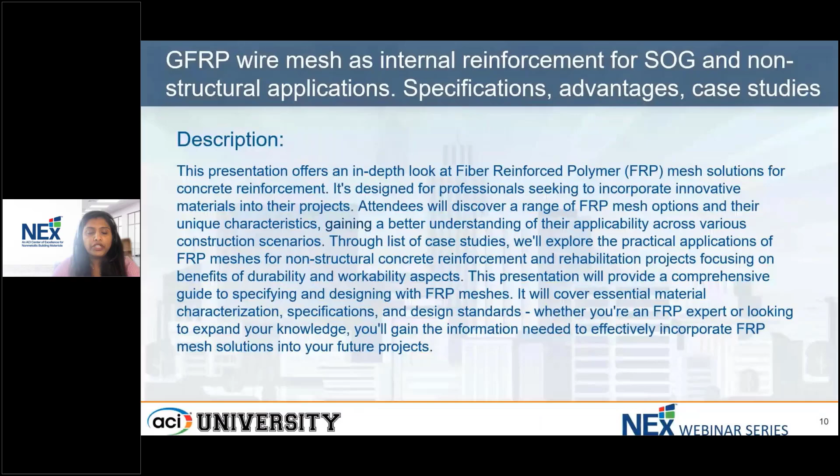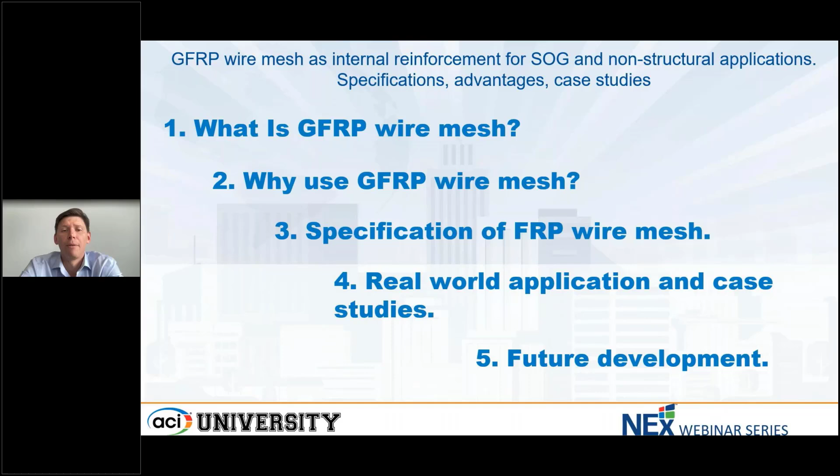Today, we will touch several topics. First, we will start with FRP. What is FRP? What is GFRP? What stands for FRP? Why do we use GFRP meshes? What's the case and what's the reason for so? Then we will definitely describe the specification of FRP wire mesh and then the real-world application and case studies. However, as with ACI, progress never stops. We will also touch the future development.

So what is GFRP wire mesh? To discover that, let's discuss what is FRP, what stands for FRP. So FRP is fiber reinforced polymer. It means that we have fibers and polymers involved. When it comes to fibers, there are multiple variations, the same with the resins.

Basically there are two main types of resins used to bind the fibers, either thermoset resins or thermoplastic resins. When it comes to thermoset resin, there are several options as well: it can be vinyl ester resin, epoxy resin, polyester resin, or polyurethane. When it comes to fibers, there's a great variety as well. It can be glass fibers, basalt fibers, carbon, and aramid, known as Kevlar as well, but Kevlar is a trademark.

So to figure out what these acronyms mean is very easy. We love these acronyms in our industry, but it's pretty simple and straightforward. For GFRP, it's glass fiber reinforced polymer, so the first letter means the fiber type used. Same with BFRP meaning basalt, CFRP meaning carbon, and AFRP meaning aramid. On the slide, you can see the difference in the appearance of different bars. Glass is obviously white, basalt is dark olive or brown if you will, carbon is black, and this goldish color is aramid. The resin looks the same; pretty much all resins look the same.

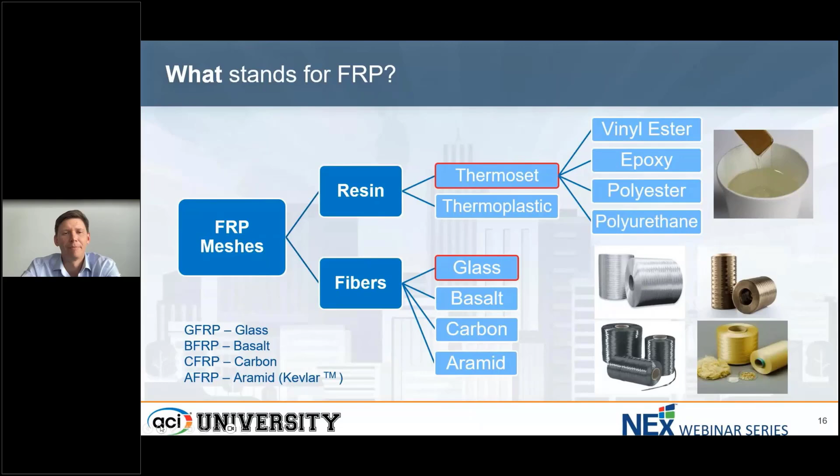To manufacture the FRP or GFRP specifically, wire mesh, we have to produce the wire or rebar first. This slide shows the production method called pultrusion, described with pictures and a scheme. First we take fibers from the creel, send them to the bath with resin, and impregnate them with the resin, then send them through the die to form the shape of the wire or rebar.

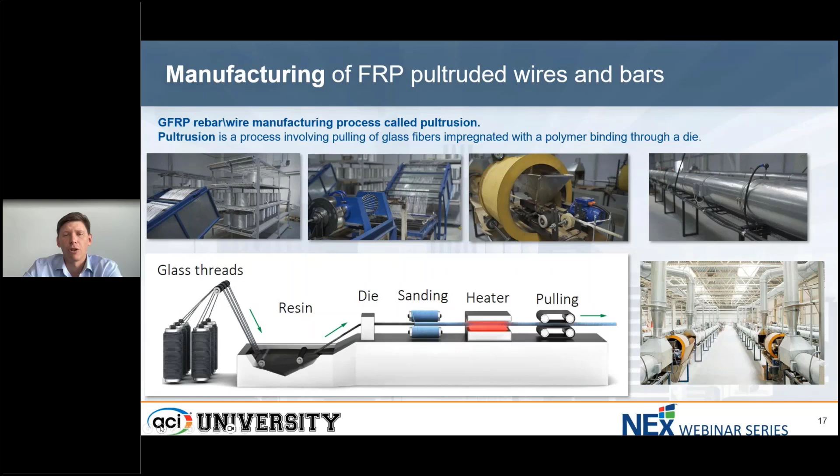Then, depending on the product, some bars or wires are sand coated, or receive some other surface treatment. Then the bars or wires have to be heated to cure the resin, and at the end of the line we have the pulling system and the cutting machine. So it can be very well seen here on the slide - from left to right, all stages of the manufacturing process are shown.

So when we come to the point of the difference, why do we talk about FRP as a different material? I would like to yield the floor to Dr. De Caso to explain the difference in the behavior of FRP materials compared to steel.

Thank you, Igor. Shifting gears, I want to focus on three main things in this slide, specifically discussing wire versus bar. On the left-hand side, you see a scanning electron microscope image of a cross-section of a wire and a bar. The little dots represent each individual fiber filament, and the darker part represents the resin, as Igor mentioned, that surrounds it. So a key aspect of a bar versus a wire is obviously the overall size.

As you reduce that size from a bar to a wire, ensuring that you have adequate distribution of the fibers, and adequate saturation around those fibers, is going to be critical in order for that wire system to be effective at transferring loads as it goes through the concrete into the reinforcement.

On the right-hand side, we see a typical stress-strain curve with three colors. Let's start with the bottom, red - that is your typical steel 60 KSI performance. You have that plasticity, that plateau, that horizontal line that continues probably all the way until a very large deformation. This is a ductile material, it elongates. And we'll start here by saying that FRP does not behave like that.

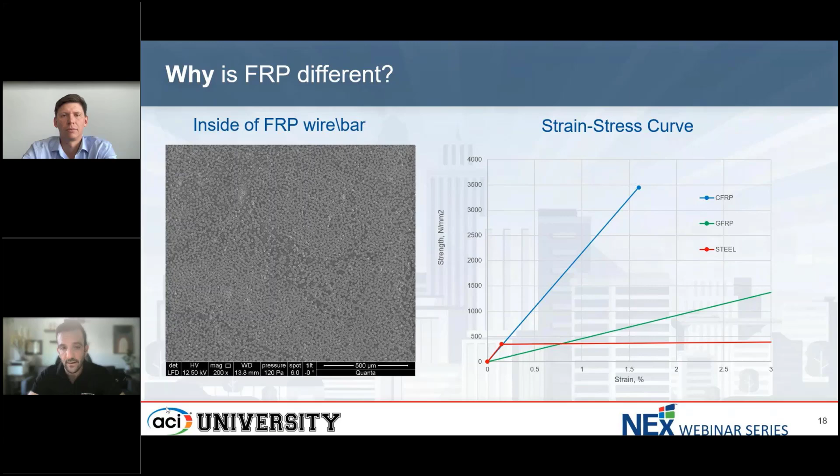It's important to say we have a good and fundamental understanding of these materials, and with this understanding we can therefore understand how to design and how to use them. And obviously I went a little too far, so let me go back.

I should open a parenthesis that currently as chair of ASTM D30.10 subcommittee on composites for civil structures, we're working on an FRP mesh specification. This is a standard specification, and it looks at the classification of different FRP mesh types. We're primarily dividing this into 2 parts.

On the left-hand side, you see what we call the wire type. These are typically composed of longitudinal elements that are less than 1/4 of an inch nominal diameter, and you can see designations like W1.4 or 10 gauge. So we are borrowing the same nomenclature that steel has in order to adopt, classify, and identify the different dimensions of these wires.

And in the same way, you have on the right-hand side the bar type mesh or mat. These are typically formed starting from number 2 bars, or 1/4 inch nominal diameter bars, and then assembled together in that orthogonal X and Y direction.

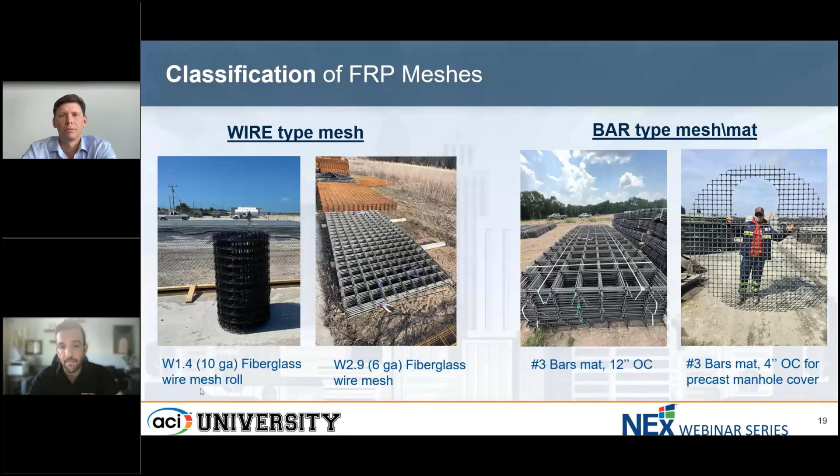The main thing is that they're going to have typically a bidirectional approach, intersecting at orthogonal angles, and they're going to have a spacing. It's important to understand that the spacing doesn't have to be equivalent in both directions, depending on the application, if you want more reinforcement in one direction. As Igor introduced on the manufacturing, there can be different spacings between both the primary and the secondary direction.

Talking about the mechanical fastening, or how we tie those elements either from a wire standpoint or from a bar standpoint, I think the industry is experiencing a lot of innovation and creativity. On the left-hand side you can see what is typically seen, an example for bars where plastic zip ties are used. Steel or coated steel ties can also be used in these applications, although it's typically not preferred in order not to introduce any steel into the concrete section.

On the right-hand side is a photo that Igor took at the last World of Concrete, as a startup company. What you see on top are those four FRP bars running longitudinally, and this is a manually operated machine that can put ties, in this case four snap ties, at each instance when you press the button of this prototype machine. Then you can slide the bars however much you want in and out, and then place the other bar, and then snap four ties.

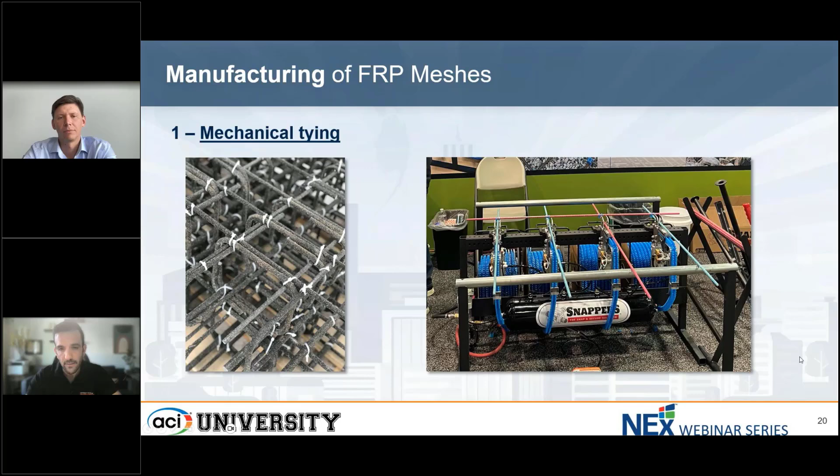So this gives you an idea that if you're looking at manufacturing either offsite or bringing fast tying and reducing labor of the tying, in this case this would be applicable to the bar type meshes. There are certainly a lot of solutions, from the traditional manual ones to a lot more innovation.

Another type of connection is injection thermoplastics, where it creates a plastic weld, in essence, between those elements, in this case the bar elements, controlling both the spacing and the location of each of the bars. That's primarily the objective of that connection, or that quote-unquote weld, is to ensure that when handled, when placed, and when casting, they stay in place. So we do not want to see any displacement or any relative slip between those mesh elements, whether that's a bar or a wire type.

So that even if you handle it, take it out of a truck, throw it, step on it, as we will see in some videos, the joint becomes very important in making sure that the mesh remains true to its dimension as it goes through the construction process.

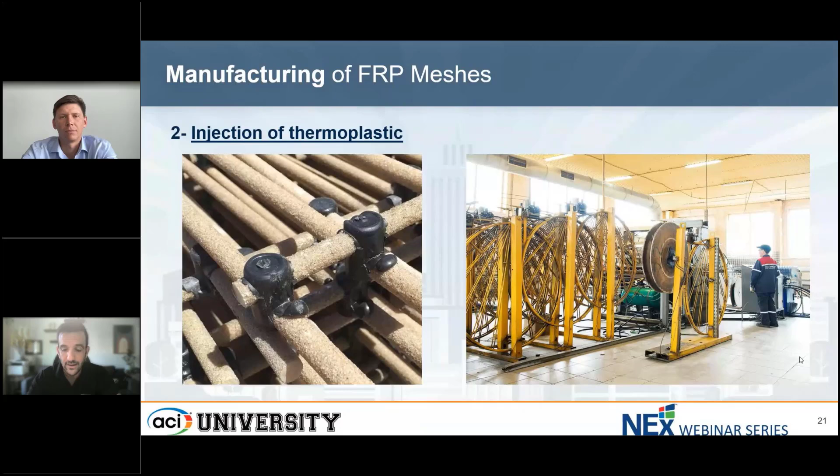On the right-hand side you see an exciting photo, I think, at least I find it exciting, on coiling. When we start talking about small diameter bars or wires, you can certainly start coiling the material, which hopefully makes you think transportation, different locations for obtaining the mesh, and then manufacturing meshes near the construction site by having a larger quantity of volume being shipped without shipping too much air. So exciting stuff happening around the wire side.

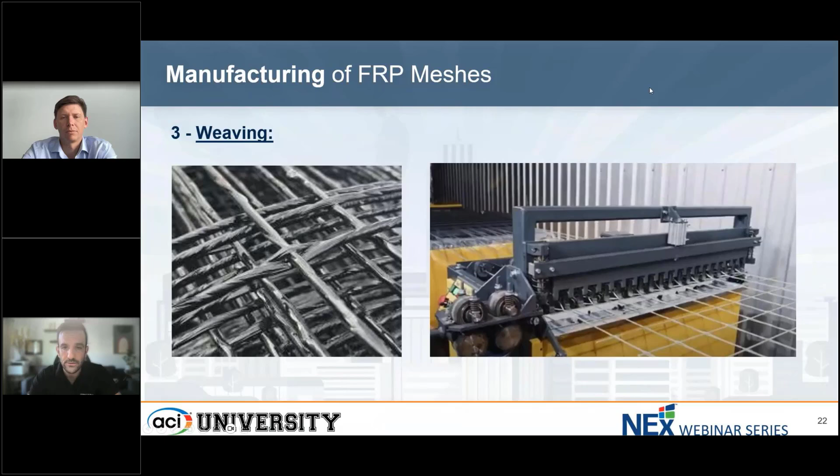So in this case, it's a sort of one-step approach where the mesh is being produced simultaneously without having to do post handling of connecting those elements.

And with that being said, hopefully, if you're thinking about why we should use a wire mesh, if you're not 100% sure, Igor is going to clarify that for us. Igor? Thank you, Francisco.

So do I have a control?

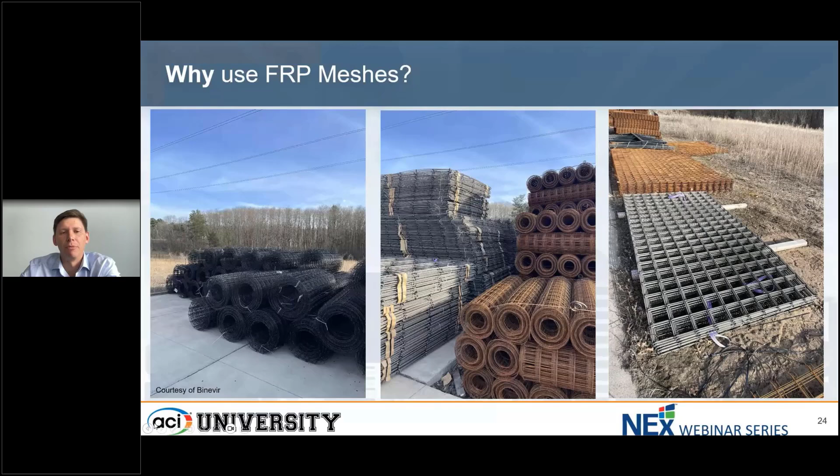So why use GFRP wire mesh? I got a few brilliant examples. I like these pictures because they definitely show the difference between steel wire mesh and FRP wire mesh and its appearance. Both can be kept outside, and unlike steel wire mesh, the FRP just doesn't rust. That's a brilliant property that we're going to be utilizing.

However, there are several key attributes to any kind of FRP mesh. They're relevant to all of them. First is the durability. As this is a non-metallic material, it is absolutely corrosion free.

Then we have weight reduction. In some applications it is really very critical. The productivity and speed of construction, that's a game changer. When it comes to workability and speed, it's crucial. That's loved by contractors. The absence of memory, or vice versa we can say it has memory, stays flat all the time.

Higher tensile strength, as Dr. De Caso emphasized before. Yep, we have and we understand the mechanics very well. FRP as a material is stronger in terms of tensile strength, and we know exactly how to address this in the design.

Then sustainability and lower carbon footprint, and that's pretty tricky stuff because FRP itself has a lower carbon footprint compared to steel reinforcement, has been proven. However, in many cases, the use of FRP reinforcement may allow us to reduce the amount of concrete used in the project, which brings additional savings on

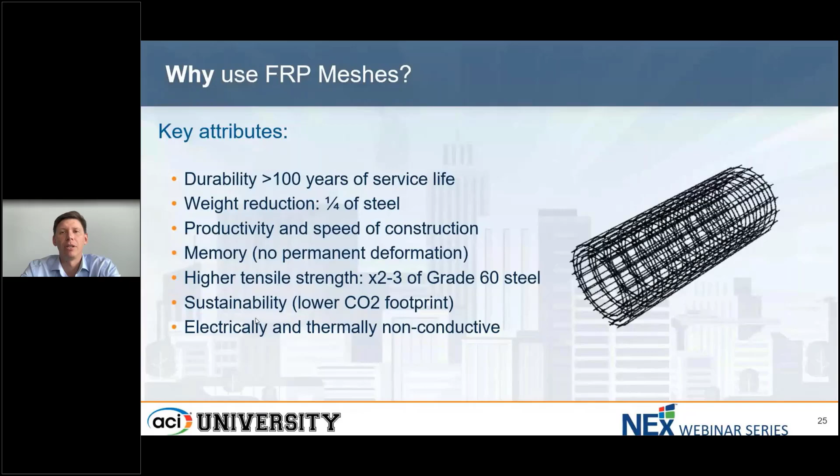But talking about some real key aspects, there's the lightweight of the mesh. Just to compare, a typical standard roll of steel mesh, 5 feet by 150 feet, weighs over 150 pounds - I would not be able to lift it. However, with fiberglass wire mesh of exactly the same dimensions, 5 by 150, it can be easily lifted by just one hand.

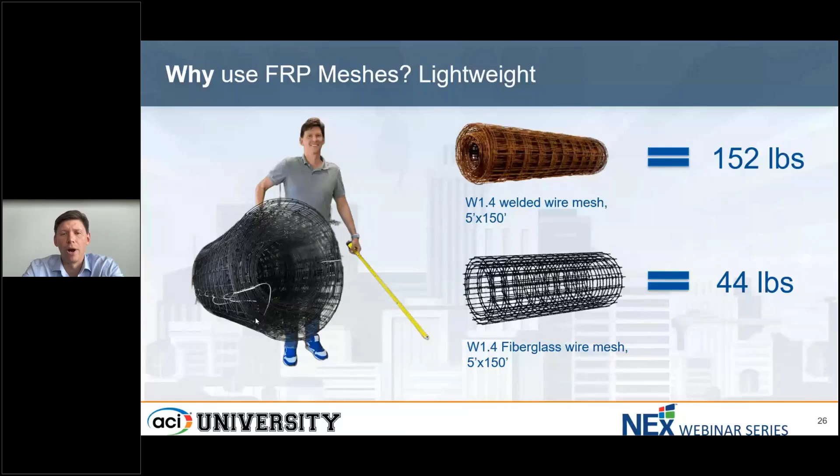And talking more about workability on the job site, we have 3 videos that we would like to share with you, showing real-life examples of the workability advantages. Aparna, would you please run the videos for us?

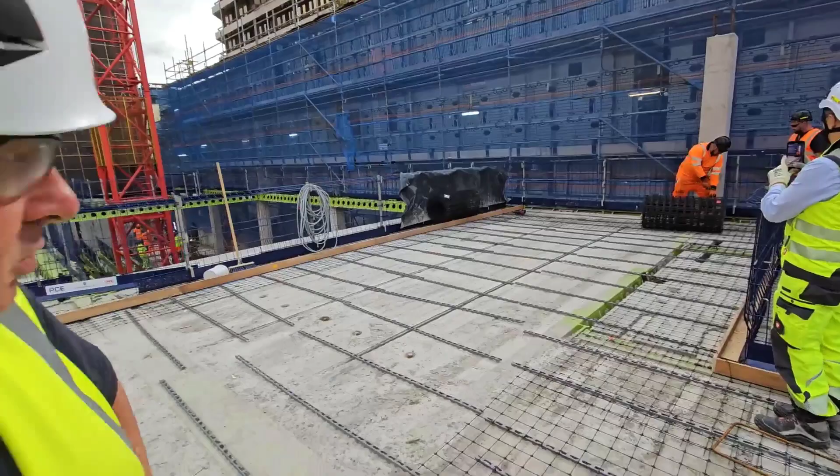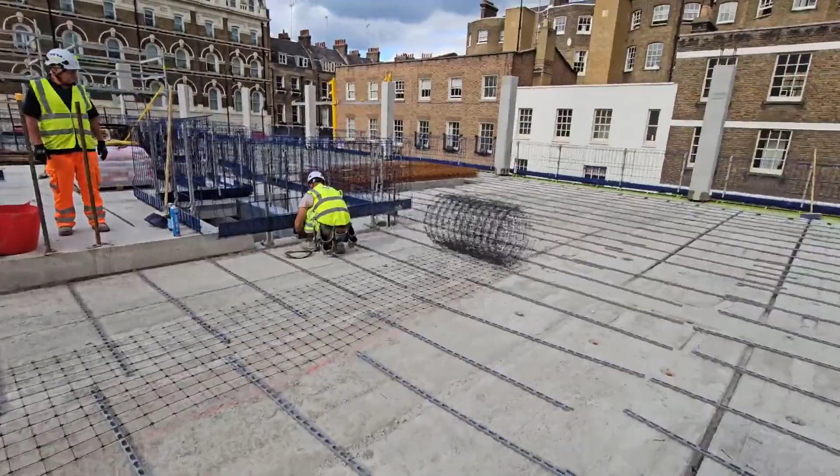I got this video from the UK maybe a week ago or so. It is a topping screed, a topping layer of concrete on the existing slab, and the mesh on the rolls. It lays perfectly flat, so there's no memory, as we said before.

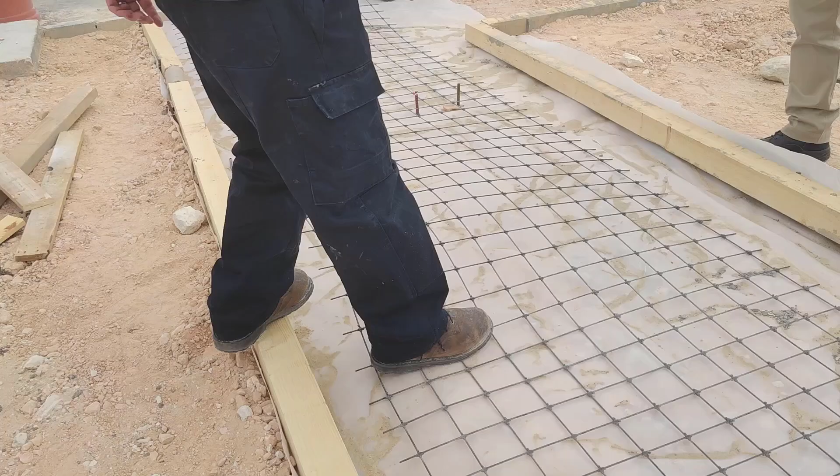I should say, have you seen how the workers are looking at the mesh as it unrolls? If we can play that again, I think it was just as impressive the first time as the roll was coming through. Anyway, sorry to interrupt.

Okay, there we got the same video, but look at the faces of the workers. I think this is fantastic. Look at the guy, he's like, is this really happening? I think that speaks volumes. Sorry, I would imagine how much time and labor were saved there.

Yeah, this video is courtesy of the Saudi Aramco team. It clearly shows there is really no memory. We can step over the mesh, drive over the mesh, it will stay in place.

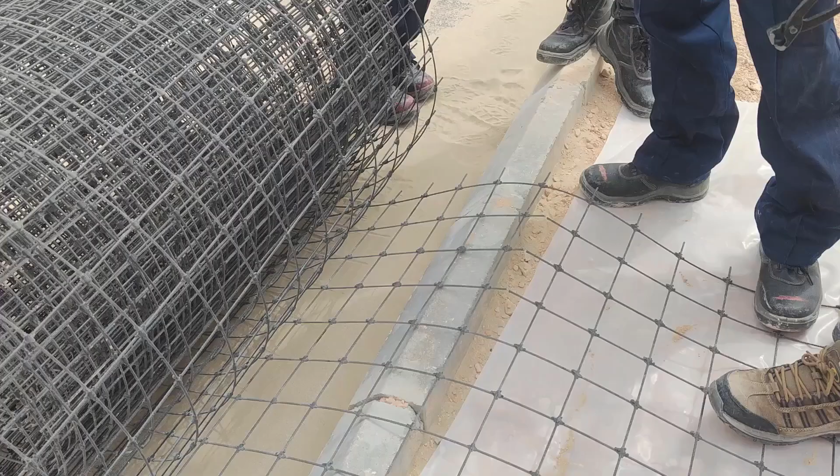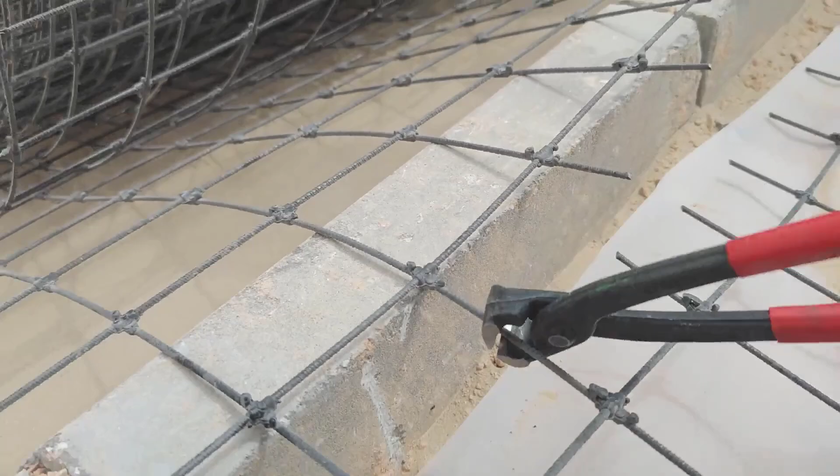And the third video, yeah, love that one. The cutting process, it's very simple. Brilliant.

I think as we wait for that, on this slide, specification is very critical. We understand that if you're at any part of the value chain of the construction, and if the products are not specified, number one, you're not going to have the assurance of the performance of the product. Number two, the owner, client, or whoever, they're not going to be able to communicate clearly what it is that they need. So specifications really establish this relationship between a supplier, an application, and a client or buyer in order to provide that. Alvaro?

Well, I'm going to go ahead and keep going on the next slide, and I'll steal a little bit of Alvaro's thunder. In terms of specification and qualification, I should acknowledge that Dr. Ruiz is certainly leading a lot of the work in the American Concrete Institute 440 Committee H, translating a lot of the innovation as we are going into its application.

When we look at a specification, we're primarily looking at testing and evaluating the product, both the product as a resultant overall product, that's the mesh you see on the bottom, but it's also important to evaluate and test its constituent materials. By understanding the fiber type, we can reference fiber specifications so that as long as you use a specified fiber, the mesh you're fabricating will meet certain performance. So performance-based specifications become very critical at advancing the industry.

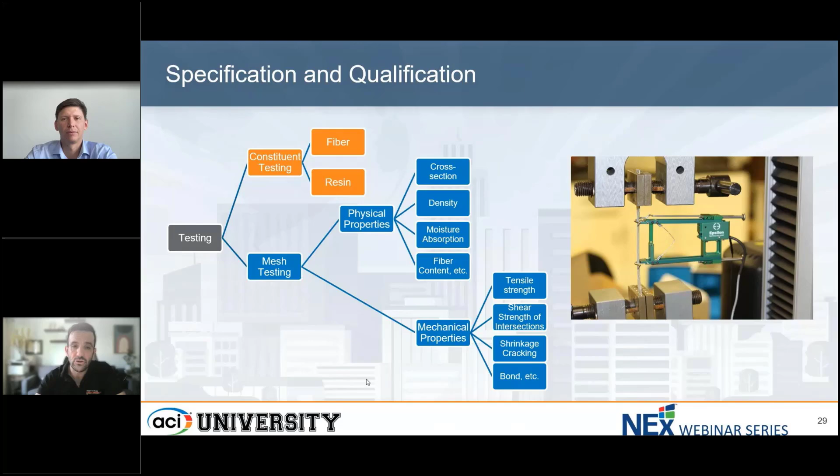The mesh itself has both physical and mechanical properties, and those properties will vary. These are driven based on the performance of the material in its location, in concrete. It's important that all of these requirements are evaluated and measured to assure the performance of the product. If you're missing one, if you're nearly there, it's like you didn't quite finish the race, the finish line was a meter in front of you. It doesn't mean you finished the race. That's important because some products might not fully qualify some of these aspects, and therefore those shortcomings with a specification assure that the system meets the requirements.

Already the International Code Council evaluation has an acceptance criteria, 521, that goes through the entire requirements of qualification testing to qualify that product, in this case an FRP mesh, for its application in the building environment. I'm not going to go through all the different ASTM standards, but the arrows I'm pointing out are the primary differences compared to other FRP rebar products, additional tests specific to the mesh type of reinforcement and its application.

As a side example, this is what we call an evaluation service report, issued by the International Code Council. The evaluation service report is a way to show compliance with the international building code requirements, as you can see on section 1 of the scope, and how the design, installation, and conditions of use work. This provides the engineer of record on any project, as well as the owner, assurance that that FRP mesh meets the criteria for its use in a building environment.

That way it accelerates the process of implementation so that we don't have to reinvent the wheel from a qualification point. It's very important that with this type of validation system, you know what you're getting and that it has met and undergone all the different things. This is a great example coming from Binevir of a manufacturer that has completed this exhaustive process. If you look at the remaining sections of an evaluation service report, like section 6 and 7, they make reference to a very important aspect of the entire product, which is the quality, the control, and the assurance.

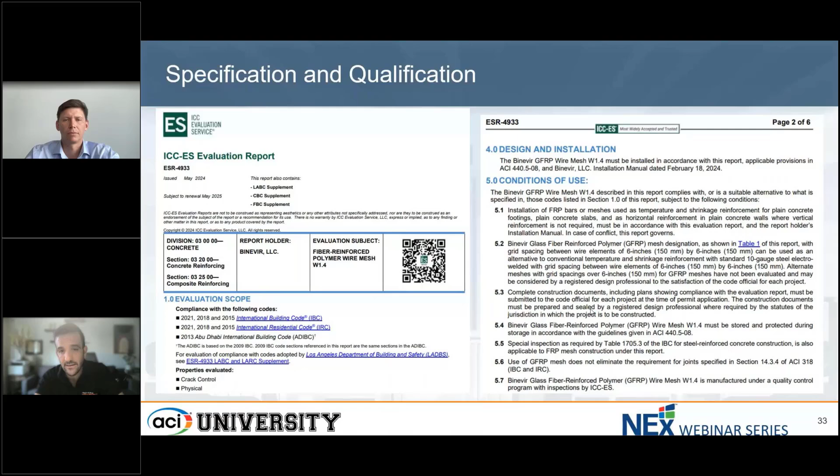Not only the physical and mechanical testing as we just discussed, but in order to be building code compliant, the mesh product you've tested and evaluated has to be the same product you continue to produce and sell. To meet that assurance, the ICC provides requirements for quality control documentation that a manufacturer, like the example we see on the screen, has to meet.

The manufacturer will consolidate, in a sense, the information coming from an evaluation service report. On the left-hand side, you might have a concise table providing the specific material properties you'll need in order to design for it. On the right-hand side, manufacturers might provide the design professional easy-to-look-up tables specific for the product, to understand the spacing, the thickness of a slab, and the different design parameters to easily implement that FRP product into a project. This expedites and facilitates the entire design process so you could easily pivot from a traditional steel reinforced horizontal slab on grade construction into a non-metallic FRP mesh, taking advantage of all the benefits previously explained.

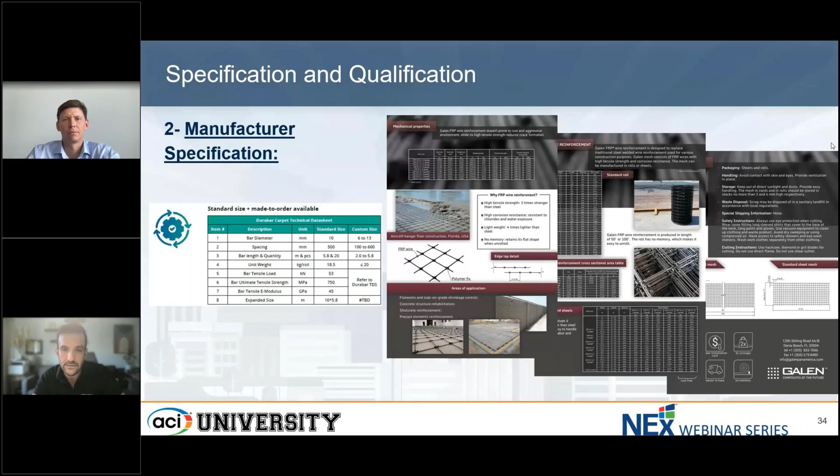As we go to other current specifications that exist, I'll finish with this slide before passing it over. ASTM D7957 and D8505 primarily talk about FRP rebar. They start on a number 2 bar, and manufacturers will provide mesh products using those bar products. So you can get specifications on the bar that meet those criteria, and in a sense reassemble them to produce a mesh. So in lieu of a mesh-specific spec, you can use the current rebar-alone specs.

Additionally, ACI 440.1R, which Dr. Ruiz is currently co-chair of the subcommittee for, they're leading an update of that document, last published in 2015, to bring in the innovation that has happened in nearly 10 years, in order to be up to speed on the work that has been done.

440.3, 440.7, and 440.9 are also additional documents in terms of construction, specification, and testing that can help throughout this process, where if there's a gap that a professional designer, engineer of record, or somebody in the value chain of construction identifies, many of these gaps are typically addressed through the specifications reference.

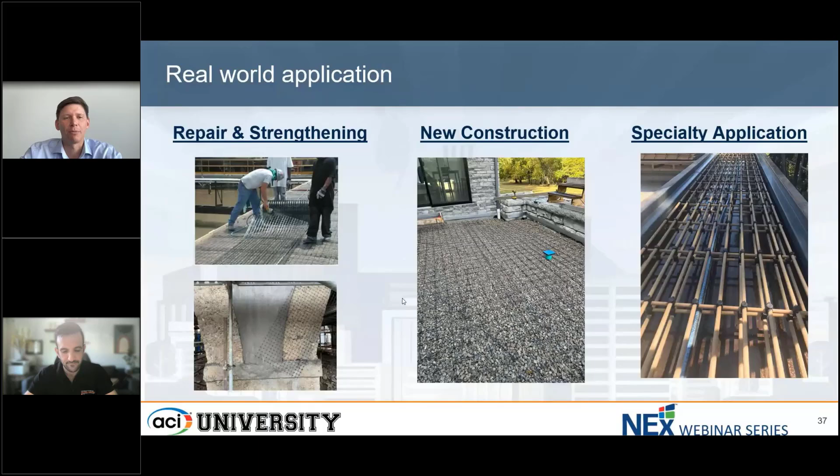As Dr. De Caso mentioned, our alliance from Europe—this bridge was repaired and is located in Prague, Czech Republic. These pictures are courtesy of Orlitech, a distributor of materials in the European Union. The existing concrete structure was repaired, and this topping layer—stucco in this case—was reinforced with FRP, with no metal inclusions, including the anchors connecting the existing concrete structure to the wire mesh. Those were also made with FRP material, so that's a completely non-metallic topping reinforcement. Next, please.

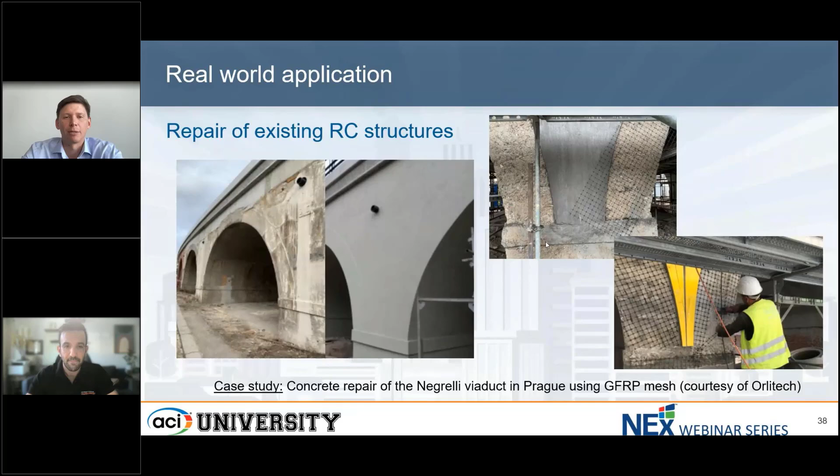I think this is typically a misconception for FRP materials, that they cannot be bent, but a better word is curved to shape an existing construction. They can certainly be curved to mimic the shape of an existing surface. Bending them at a 90-degree angle is clearly not feasible. But as we saw from the coiling approach, you can have relatively short radii, especially for smaller diameter wires, without causing strain, loading, or damage.

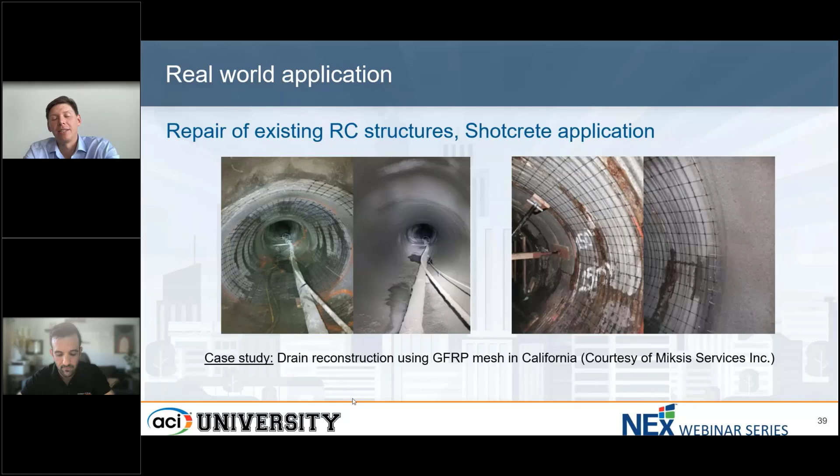I'd like to get back to the previous slide, because I love talking about different attributes of FRP bars. We mentioned durability - as the material is not prone to rust, it's a perfect application. But in the next slide, we have the same win.

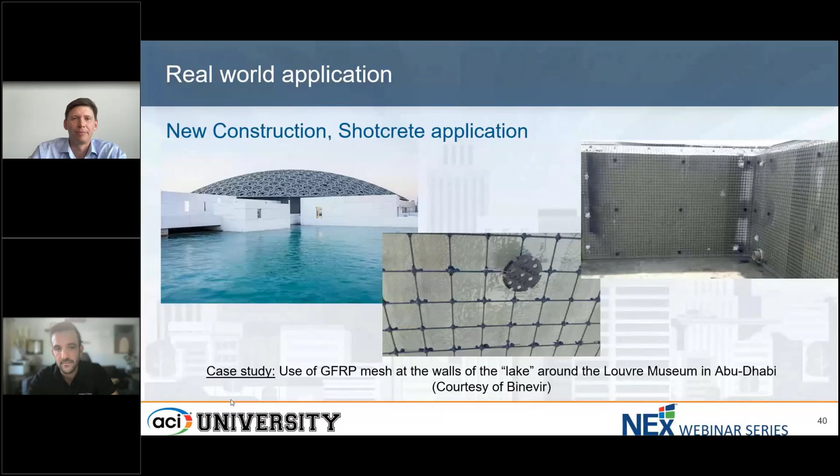Very good point - so not only the mesh itself, but the compatibility of holding that mesh in place with non-metallic connectors. A less attractive but very critical type of project is pavements and slab on grounds - these are critical for our infrastructure.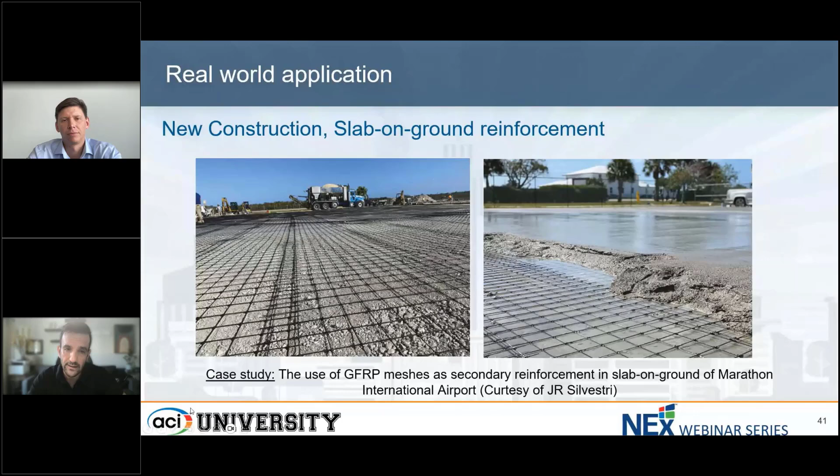One of the main aspects of this type of work is that the contractor delivering the concrete didn't need to change anything. And because of the long rolls we see in the picture with the truck, the amount of waste from splicing or overlap that you typically need with 8 by 4 foot wire meshes is significantly limited. By ensuring that long length, you're limiting the number of splices, reducing the amount of waste and unused material. Lessons learned on that.

Next slide - welcome to Australia. This is still an ongoing project for many years: on-site precast seawall sections, later installed as an actual seawall.

The interesting part here is that the mesh is made of two different rebar sizes - a number 4 bar, or half-inch bar, in the longitudinal direction, and a 10 millimeter, or number 3 bar, in the perpendicular direction.

The joint is made with thermoplastics, and you'll notice that the left and very right rebars have slightly different spacing - they're closer to each other than the bars in the middle. This is the flexibility of the mesh manufacturing process that gave us this advantage.

Other than that, two main aspects were critical for this application: first, the non-corrosive properties of the FRP wire mesh, and then the workability aspect. As the mesh was pre-made, it was very easy to lay in the mold, and the light weight of FRP itself was critical there.

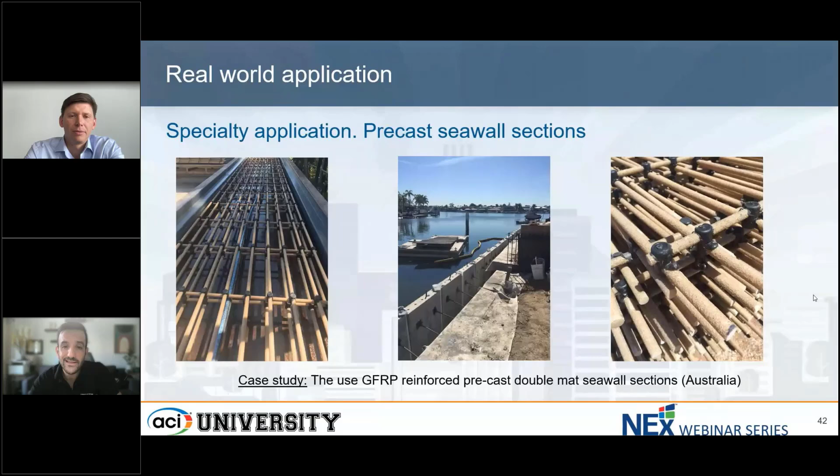I'll reiterate that the ability to customize your mesh reinforcement is very critical. This doesn't really happen when we look at the state of the art in steel, unless you're using just rebars and handling them manually through labor.

This is another quick example, also in the precast industry - looking at sandwich panels, where we want to reduce the thickness and weight of those elements. This is another core application where, given the serviceability requirements these panels have - many times non-load bearing or minimal load - it's a great application for materials where the stiffness of the reinforcement doesn't need to be comparable to that of steel.

Excellent example of easy handling in the precaster, with no changes to the precast process and construction. You can see in this case they're using those circular things as the spacers. It seems like they just grabbed them and threw them in randomly - an interesting way to place spacers.

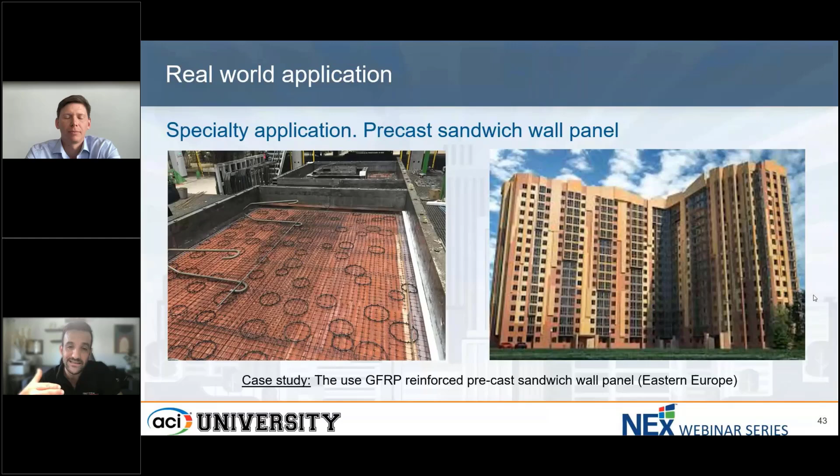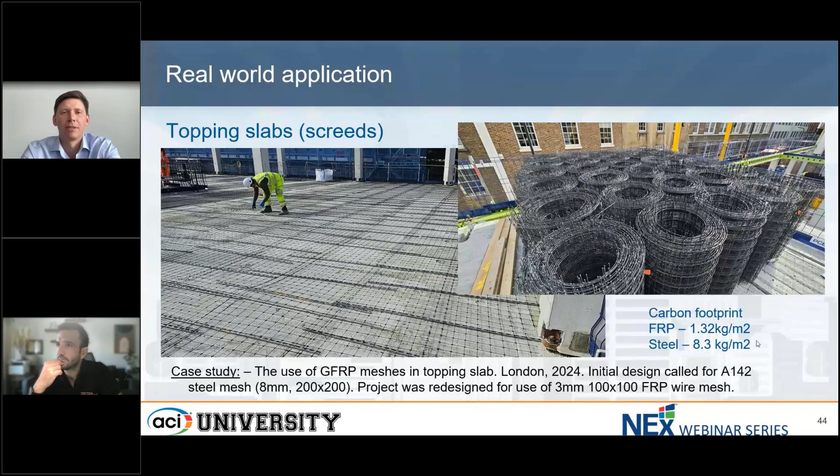I think it creates an approach whereby the impact on existing construction processes is significantly minimized or uninterrupted. This is the topping slab, from the exact same project where we took the video before. The wire mesh was supplied in rolls that unroll themselves and lay absolutely flat. The reinforcement for this topping slab was installed in 2 hours, compared to 6 to 8 hours for steel mesh reinforcement - that's data we got from the contracting company.

Another case study from the UK, in Devon County, England. It wasn't easy to access this construction site due to the steep slopes there, so workability and the lightweight nature of the material were critical. However, durability was extremely important too, since seawater is everywhere - a high chloride environment - and shotcreting was the construction method used.

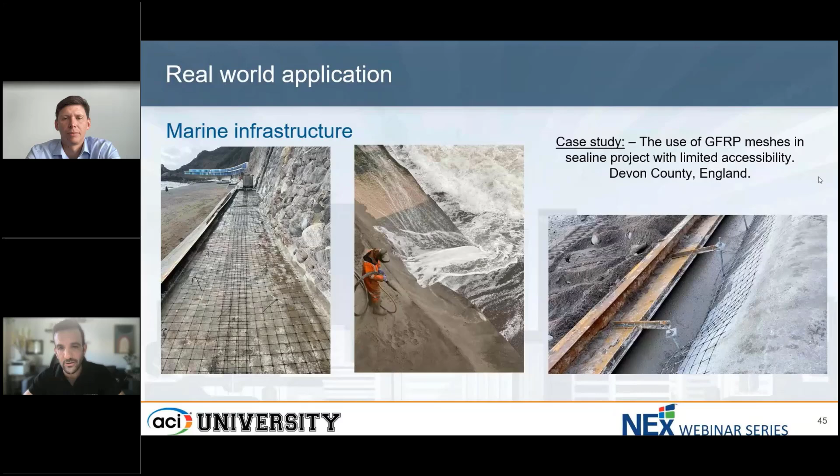A misconception I hear from many colleagues is that the power or projectile of the shotcrete might damage this glass-type of system. This is a misconception - the shotcrete process can be calibrated so it doesn't damage any of the reinforcement used. It's actually used in sandwich construction where you're projecting onto polystyrene, and that doesn't get damaged. So it's important to understand it's not just any shotcrete application - you have to be cognizant of the process you're using, but it is compatible and can be compatible.

As an example, this specialty project is a skate park located underneath Interstate 95 in the middle of Miami, where that area was reutilized. You can see the surface finish on the right-hand side. Skateboarders have very high specification requirements on the finish and hardness of the concrete - I was pretty impressed about how much they actually know about concrete.

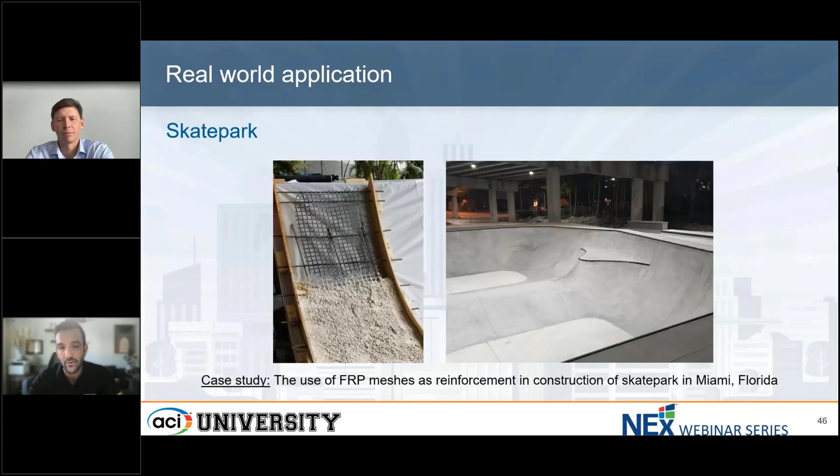On the left-hand side, they were a little hesitant about using this basalt FRP mesh. So a demo section was done first and finished, halfway through the shotcrete process being used, and at the end of the day they were happy with it. This gives an example that if you're adopting something new to your industry or to the stakeholders in that area, you could always start with a smaller project, look at a demo, and then move forward from there.

Another quick case study - driveways, again slab-on-grade. This is a driveway on a residential construction in Boynton Beach, Florida. A lot of Florida examples here, where I don't think durability or corrosion resistance was the driving aspect, but more about workers being able to have productivity while reducing fatigue and the work related to placing steel reinforcement.

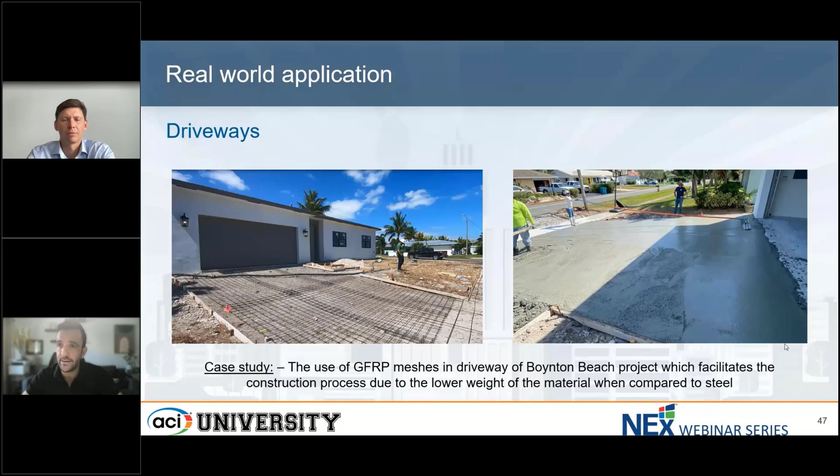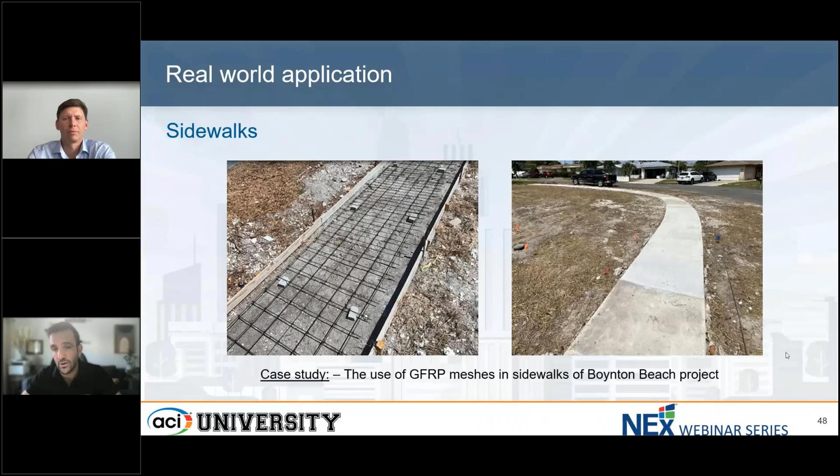Similarly, the last example we'll finish with is pedestrian walkways - any type of sidewalk or pedestrian walkway, typically 4-inch thickness with minimal reinforcement to keep them in place and avoid cracking. This is another great application where we can leverage the properties of the concrete to bring down the cost of the entire project, since we might not need admixtures or other elements in the concrete mix to passivate the steel and protect it against corrosion. Instead we can just use non-metallics and modify a standard concrete mix, which drives down the overall cost of the project, as concrete ultimately makes up most of the materials.

Shifting gears onto future work, Igor, do you want to tackle this slide and I'll do the next one? I like actually Alvaro to take care of these slides because he is the most critical part of the puzzle here. Okay, so what's next?

I think Francisco mentioned the development of the new ASTM standard, which is in ballot. It's of great importance to have standards for the safe and efficient use of this type of material. Within ASTM D30, Dr. De Caso was leading the efforts of developing the new ASTM for FRP meshes, proposing more detailed characterization methods. We've heard that there are some standards that help design with FRP meshes, but I think we can do better, and this helps the entire industry by tying these tailored characterization methods and design methods together, which ties into the next point.

One thing is to have specifications and characterization of the material. The next step is, now that we know how the material behaves, how can we design it properly and efficiently? Not only that, as Igor and Dr. De Caso mentioned, a lot of these applications like slabs on grade are not very skilled, engineering-wise. So having design tools that are simple but that incorporate the required characterization and design guidelines would speed up the use of FRP meshes throughout the construction industry.

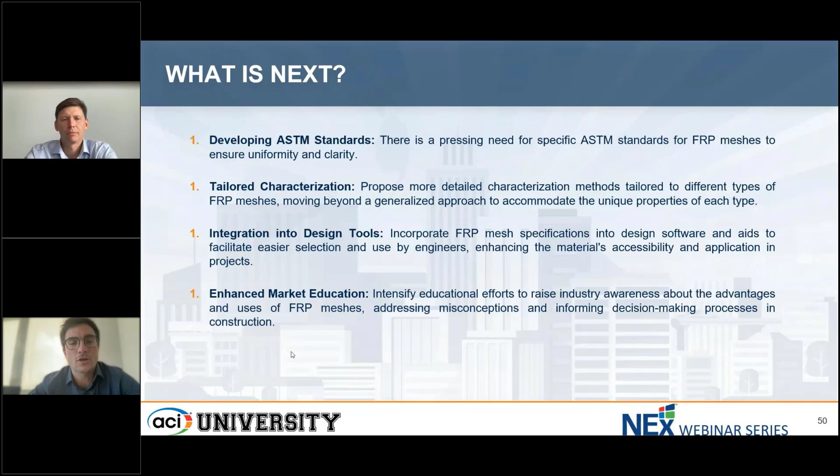And finally, to educate the market. This is critical whenever you talk about new construction materials, even though this has been out there for a while, there's still a lot of people that don't know about FRP meshes, their properties, advantages, and how to use them. So educating the market is critical, doing webinars like this one, lunch and learns, and conferences so that people are aware of this other tool in the toolbox we have in the construction industry.

Getting a little deeper into the ASTM standard, here you have the ballot document that was posted, which includes the standard specification for fiber reinforced polymer meshes for concrete reinforcement. We should be getting the responses soon. As you all know, this is an open process, so everyone can vote within the committee and outside too. If you have any additions, please feel free.

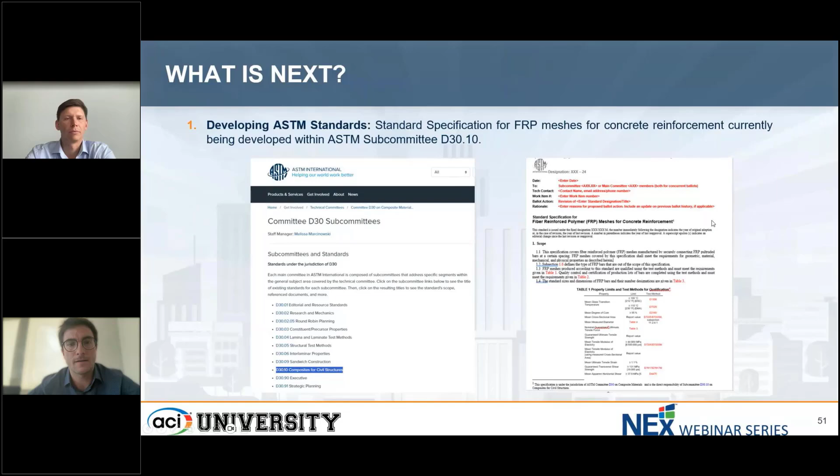I think we're running a little bit out of time, so Igor, if you want to go to the next slide. I think, okay, yes, please. If you have any questions or concerns, please share. Thank you so much, Alvaro, Francisco, and Igor for your presentation. It was very insightful, and I'm confident that our participants enjoyed your presentation and the insightful case studies.

So, first question: can this mesh be used in precast modular building members like walls? The answer is absolutely. We had those examples, and typically the barrier is the company or the precaster, since it's the first time they're using it, there's a little hesitance. I'd say just ask them not to change anything, don't change your molds, don't change any of the process, just change the reinforcement, let's go through it. You'll be surprised how welcoming they are after breaking the ice. The short answer is yes. Again, depending on your demands and capacity of that modular panel, whether it's load bearing or non-load bearing, the amount of reinforcement and spacing will need to be verified. But in terms of adopting it, that's not an issue now.

Great, thank you. Our next question is, what is the price compared to steel wire mesh? It's very similar. If we just compare the W1.4 mesh, the retail price you'll get for the mesh made of steel and FRP is going to be equal. However, the workability and lightweight of the product is a benefit to the contractor.